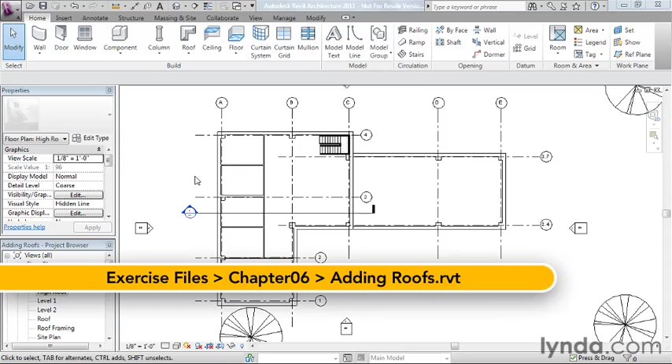What building could be called complete without a roof over its head? Revit gives us a few ways to approach building roofs. In this movie, we're going to look at the footprint roof, which is probably the most common approach to creating a roof. And in many ways, the procedure is nearly identical to creating floors, which we looked at in the Adding Floors movie. Roofs are also sketch-based objects, so let's go ahead and get started.

I'm in a file called Adding Roofs. It's the same small office building that we used when we were adding floors. And I'm on a floor plan called High Roof. This particular building actually has 2 roof levels, and this is the higher one. So we're going to go to the Roof tool on the Home tab.

And this is, again, a sketch-based object, so you're going to see the model gray out and the familiar sketch-based tools appear. Like our floors before, we get a boundary line, we get pick walls as the default behaviors. We're not obligated to use those. We certainly could sketch our roof in any shape using any tool that we like, but usually it's most convenient to start with the existing walls.

Now, before we start clicking on screen, I want to take a quick look at the options bar as well, because here we're going to see that we can tell each of our sketch lines whether or not they should define slope. Now, many roofs are actually sloping roofs, and so by checking this box, the sketch we draw will actually behave kind of like a hinge. So that sketch line will actually define a plane that's sloping.

We also can define overhangs. So often there are overhangs associated with pitched roofs. And finally, we have the same extend into wall core that you may have seen if you did the Adding Floors movie. So this just makes the sketch line interact with the core of the wall.

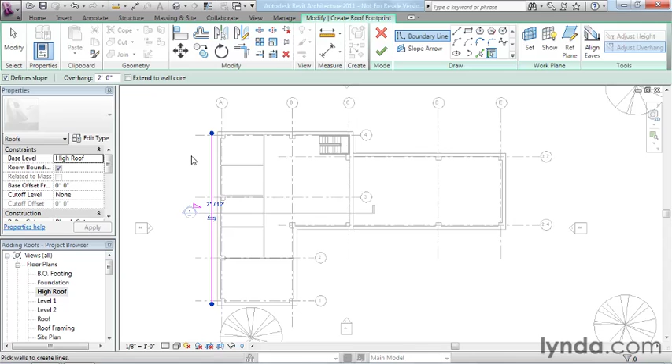Now, when I do that, I get a sketch line. I get the familiar flip grip, which if I accidentally pick on the wrong side, you can see it's pretty easy to flip it over to the other side, so not too big of a deal. And we get this little triangular indicator, which lets us know that this line is defining slope.

And then if I want to create a hip roof, I could keep making sloping edges around the space. In other words, if I click right here and also make that 4, what I'm basically defining is a hip roof. Let me just go ahead and do that on all 4 sides. Click Modify. I don't want a lot of redundant edges over here, so I'm going to keep this one really simple. Clean it up like so with my trim tool. And what I've really got is these 4 slope-defining edges.

Think of this as a hinge. So you're going to have a plane hinging at this point, sloping up. Hinging at this point, sloping up. Where they intersect, you'll get a ridge line running along the diagonal. So let's go ahead and see what this looks like.

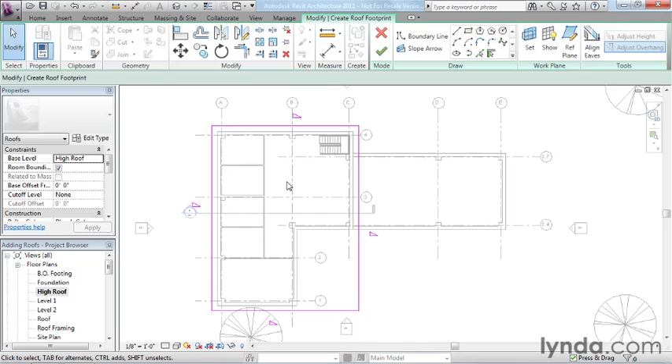Let me click Finish. And you can see here in Roof Plan View very clearly what we were just talking about. Here's our ridge lines. Here's our top peak up here. But it's probably a little bit easier to see this in either section or elevation.

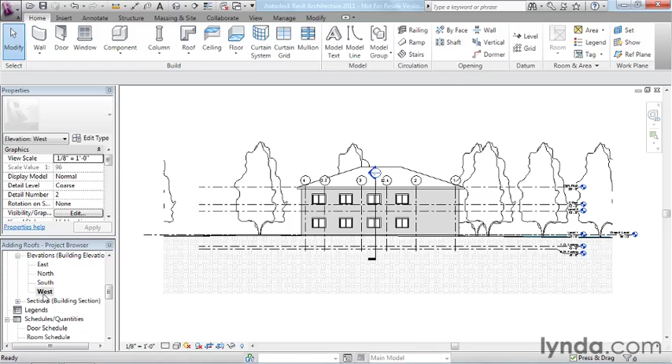So what I'm going to do is scroll down and take a look at the west elevation, and you can see the pitch right there. If you look at this in either the east or west elevation, you can see it there. And of course, if we look at it in 3D, we can see it like so.

Now, of course, this hip roof doesn't really match the layout of the building, so what we're going to do is actually modify it. So we can select it in any view, and you'll get this Edit Footprint button. Now, in the Adding Floors movie, I didn't show this, but it works exactly the same with floors. So if you select an existing floor or roof, you can choose Edit Footprint, and that takes you back to the sketch.

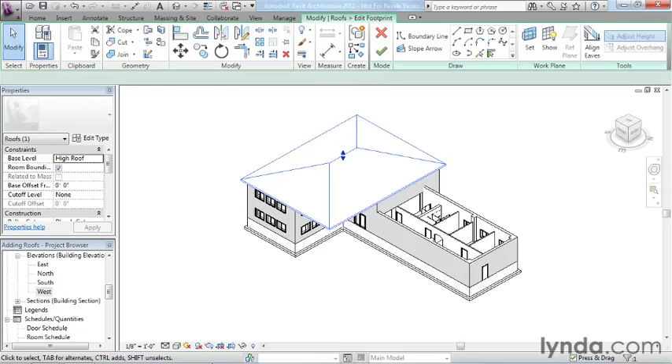Now, I could work right here in 3D and continue to make changes to this, or I could go back to the roof plan view, whatever view is convenient for you. Now, what I'm going to do is go back to Boundary Line, back to Pick Walls, and I'm going to turn off define slope this time. And I'm going to pick here and here. So you notice how that automatically trimmed up the corners for me.

Now I'd get a sort of odd roof if I were to finish right now, because I have slope defining lines intersecting non-slope defining lines in strange ways. What I'm actually going to do is select this one, hold down the Control key, which allows me to add to the selection, and I'm going to pick the other one across the way, and I'm going to uncheck define slope. When you do that, that's going to make this line and this line a gable end.

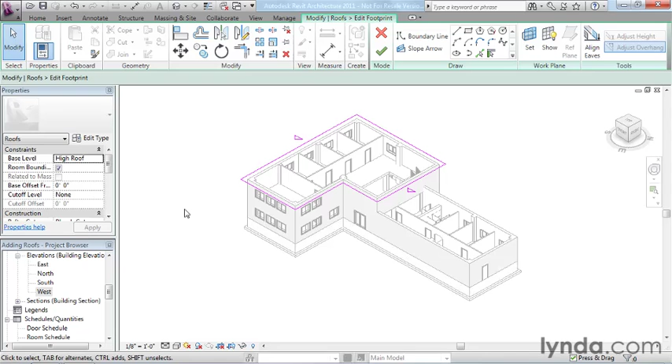So when I click Finish, I get quite a different roof out of the final sketch. So a footprint roof can actually do a variety of things. Let's go ahead and do one more example. This one I'll do a totally new roof.

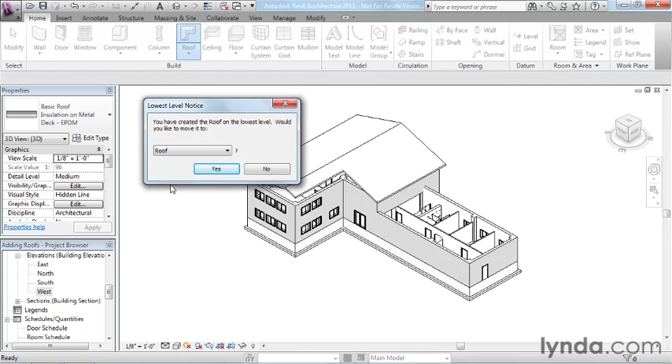Now, because I'm in 3D, Revit will ask me, well, what level do you want this roof to be associated with? Now, it's suggesting the highest level, which is logical, of course, but because I actually have 2 roof levels, I'm going to drop that down 1 level, and I'm going to say I really want this one to be on the low roof level, not the high one. So I'm going to say yes.

Boundary line, pick walls. I'll make a slope defining line here, and then I'll turn off define slope and pick here and here, and then finally I'll draw just a plain old line from here to here. So I've created just sort of a simple rectangle with only one slope defining edge. Now it's pretty steep at 7 and 12, so I'm going to click on that and let's make it 2 and 12. Click Finish, and looks like I've got a little gap there.

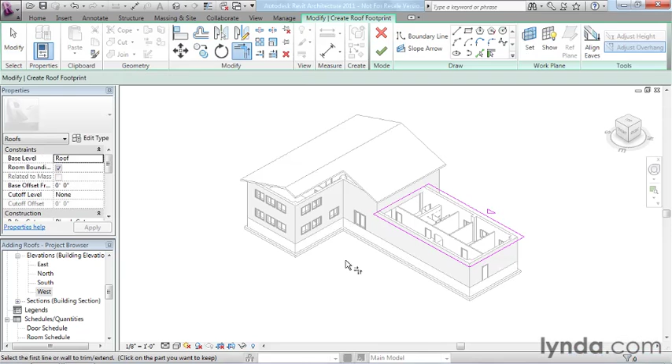Let's fix that. Just use the trim tool. That's going to happen sometimes when you're working in 3D. So to remedy that, you might want to work in floor plan, and then you'll get a better look at things. But that's a simple shed roof.

So the same footprint roof can give us a hip roof, it can give us a gable roof, it can give us a shed roof, it can even give us a totally flat roof, but we'll look at that in another movie. So there's a couple different shapes and modifications we can make, but this gives you a little bit of an idea of how you can get started using a footprint roof.